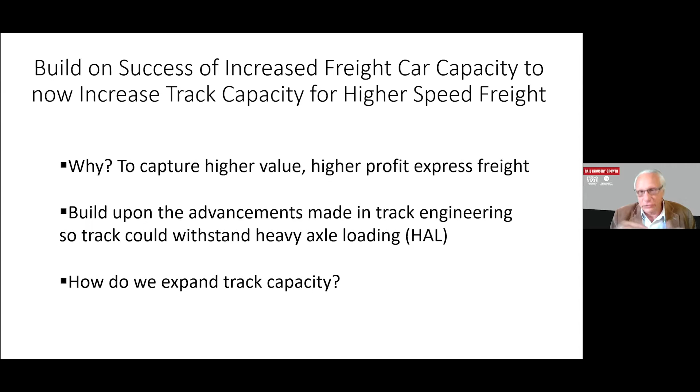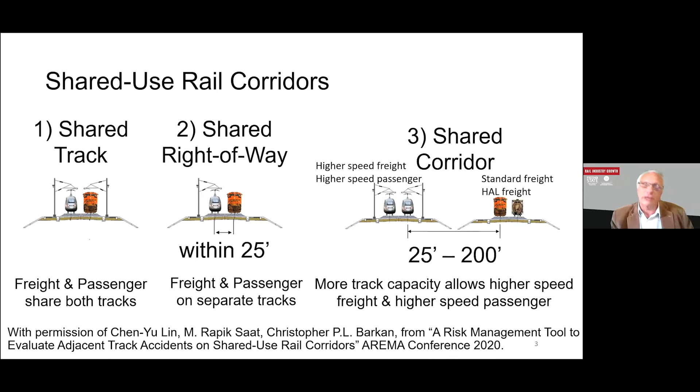And we could talk also about whether a barrier belongs there. There's a risk management tool that's referred to there. That is a paper I encourage you to read because that does address that issue, but we're not going to go into that detail for now.

All right, so I want to take you through some of the things we did at Amtrak where we did add track and it helped enormously. And we'll start with some simple civil engineering examples, and then we'll build up in terms of more complexity of how we can maybe provide this service, the one on the right.

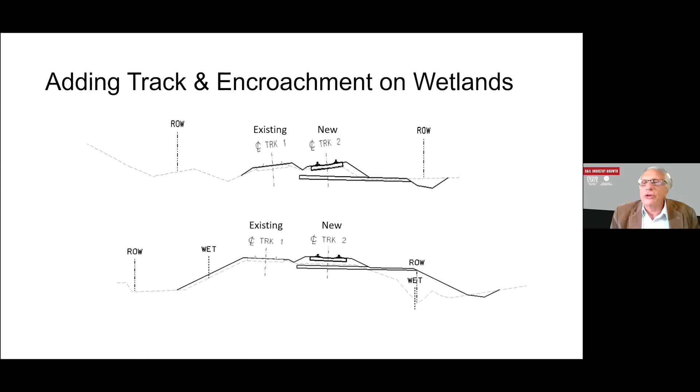So what we have to do in such cases is look at some retaining structures, such as you see there. If you didn't have that, then the slope would be in the red dash line, and that would encroach outside of the wetland. So permitting would be a problem. You might not be able to do it. Therefore, we do have the straightforward methods of going in and planning for a retaining structure to allow you to draw the slope into the gray line, which does not exceed the property, the right of way, or the wetlands. Again, this is fairly standard, so nothing too fancy about that. We certainly understand how to do that, but it is part of the planning process and the costing that would go into, can we do this?

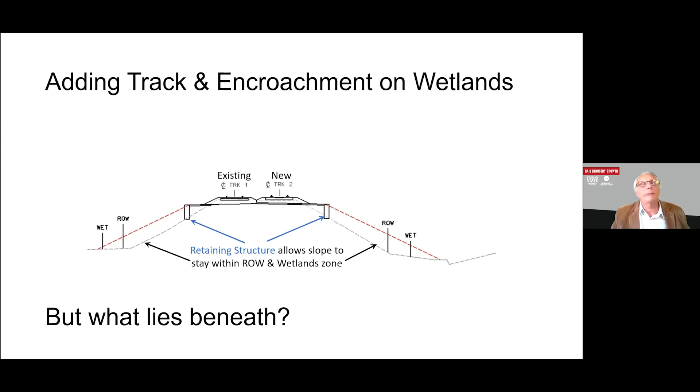Now that's fine for what the track looks like externally, but we want to know what lies beneath the track structure, within the track substructure, because that is such a key part of this. And again, what came out of all this investment over the recent decades, looking at how do we address issues of heavy axle load, how do we make the track ready for that? Well, one area of development has been the ground penetrating radar measurement system. Back when the industry was only just thinking about heavier axle loads going up from 110, this technology was sort of in its infancy. But over the decades, in large part because of the demands placed upon it to know what's going on with the track substructure, this was further developed.

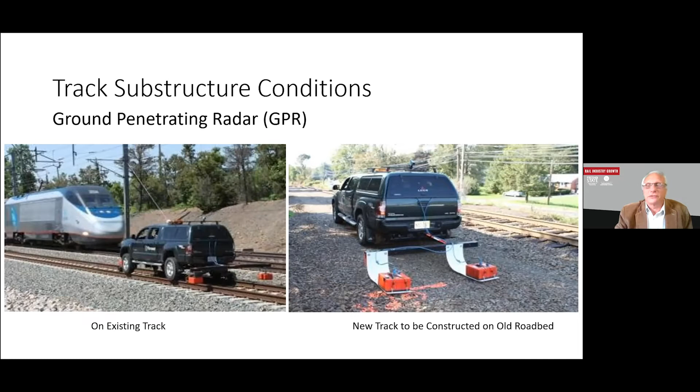So what you're seeing is some transponders that are suspended off the back of that high rail vehicle. They are bouncing a signal into the track substructure and listening to the echo coming back, processing the signal, and then from that you can determine quite a bit, as we'll see in a bit for a couple of examples. The typical case is what you see on the left, where it's on a high rail vehicle, looking into an existing track structure. But you may well want to look at the case on the right, where it's proposed that you have a new track placed over an existing road bed, and where you're going to double track a main line, let's say. There's no rails there, obviously, so you'd have to slowly drag those GPR transponders across, but it's the same idea, and the output that you get is just as valuable. An example of a couple examples of what we find.

And if you just place a new track on top of it, you could reawaken instabilities that are latent, that are just in there and will be reawakened once you start loading it. You want to know that before you put track over it. Or it could be a case where track 2 is going to be upgraded. Perhaps it's a class 4, you want to make it a class 6, and it's the same issue. You don't want to be caught unawares of some instability that when you do increase the loading and you hope to maintain a nice track geometry, you want to be sure and remedy anything before it gets that far along.

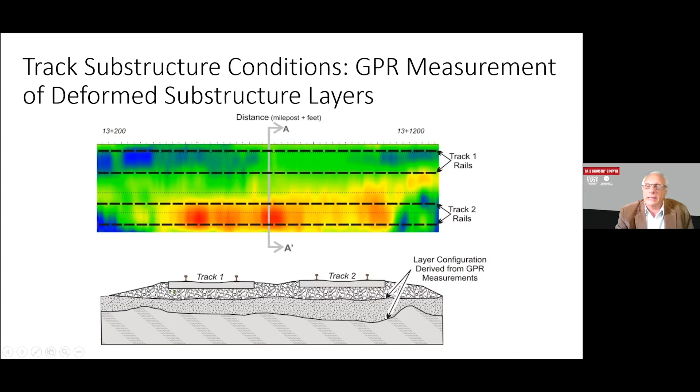So that's a GPR measurement that can look down into the substructure by some depth. You could also look at a more shallow depth. So that's looking down here in this case, but you could also tune it to look at a more shallow depth, let's say in the ballast, to look for how much ballast fouling there is in an existing track. An example is shown here. Looking down from above in a plan view, a 4-track territory, you can see by the heat plot again, hotter colors mean more ballast fouling. Drainage is poor in those areas, something that you might need to address.

Again, if track 3 is the existing track you're looking at to upgrade from perhaps FRA class 4 to class 6, you might well want to know those areas so you can address them, remove the ballast, renew it, or whatever you have to do to improve the internal drainage before the class 6 service begins. So all of these are techniques that are now available that can lend themselves also to increasing speed as well as increasing the loading as has been done.

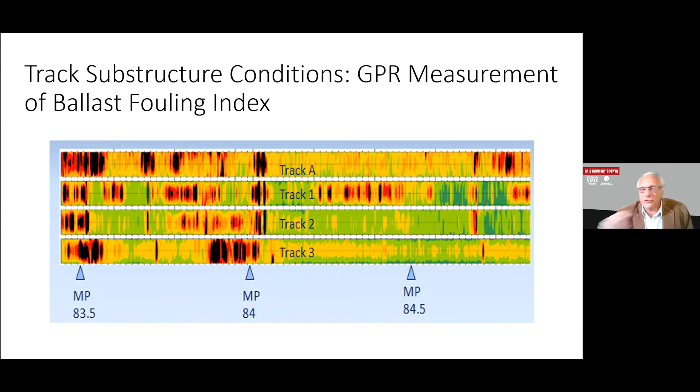Another thing that is vitally important is to not have to maintain your track so often such that your maintenance equipment gets in the way of your revenue trains, of course. Those spots that show as heavily fouled are probably joints or something that causes a lot of dynamic load. And then because they deform, you have to come in and tamp them. Well, the tamping itself also degrades the ballast, right? So it's a further whammy against having good conditions. So what you would like to be able to do is have better maintenance methods that don't degrade the ballast as much and also give you longer lasting geometry corrections.

There are a couple that have been developed over the years, again, with the intent to address the problem of increasing axle loads to make it a more durable track. This is a type of maintenance known as stone blowing. It was actually developed in the UK, and we brought it over to the United States. The process is one where instead of tamping the track, you would use a different system. It could be handheld tools, or there is a mechanized version of stone blower too. But the process is one where you would raise the track as shown from 1 to 2. At 3, it shows an ejector tube being placed at a certain depth so that you can blow stone underneath the tie. That's what you see in number 4 there. So air is introduced. That's a venturi tube.

There's an orifice that restricts the flow, and then on the other side of the orifice, where it suddenly opens up, that makes the ballast pick up speed and shoot under the tie as shown. And then case 5 shows where you place the measured amount of stone, and then you lower the rail and tie onto the stone-blown material.

This whole process is minimally disturbing to the ballast. It does not degrade the ballast hardly at all, as tamping does, and it also does not loosen the ballast. Therefore, you're building off a stable base. That's where the increased durability comes from. And how much more durable than conventional tamping? It could be typically 3 or 4, but we have seen 5 times and more increase in durability over conventional tamping.

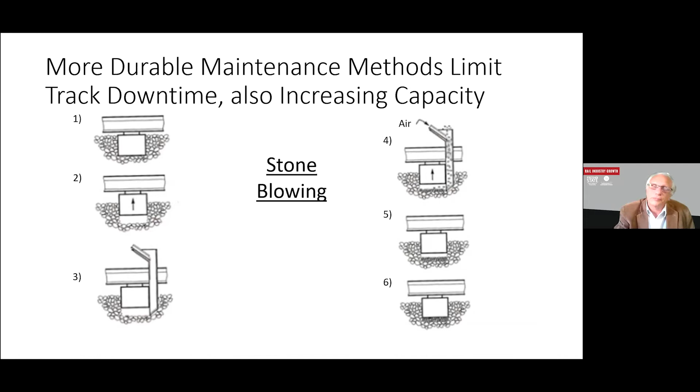Another technique that also has been developed to address this very issue, to get an increased durability of maintenance, uses a tamper in this case, but in a different and innovative way. It's called design overlift tamping. And the whole approach here is to take your existing rough track profile, which is the bottom line here, right? And raise it to a certain level, but then overlift it beyond which it would be level where the dip is removed. You actually raise it above the amount of the dip, so that once it's up there, you know this is going to happen.

When you tamp track, you get an initial fairly large settlement. But what you don't want to do is bring the track up to level and then have it settle back substantially, maybe all the way back to where it was. You want to account for that initial settlement that happens with the first few trains by overlifting it by a design amount, such that when traffic begins to pass over, it settles back down rather fast initially, and then slower and slower and slower, so that it spends a lot of time right at that design elevation shown right there.

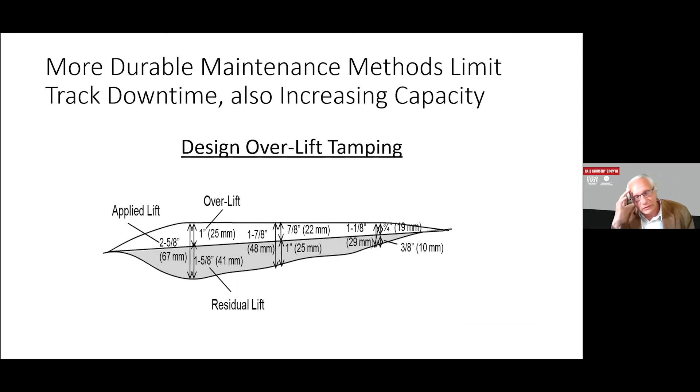So you're accounting for the mechanism of ballast settlement, and you are raising, depending upon where you are in the dip, a measured amount so that you end up with this optimal smooth profile. And this has been shown to work, as has stone blowing, for heavy axle loads, for high-speed trains. It works really everywhere. Here's an example of how well this works in the case of design overlift.

Here you see your original rough profile rail, and then immediately after you've designed overlift. So it's not optimum. It's a little bit rough in the other sense. It's a little bit raised up. Not too bad, but it isn't perfect. But it does approach the design after some traffic. You see how after 16 weeks it settles quite a bit, and then after a year it's pretty much settled into what you might call a smooth design, and then degradation thereafter is slower and slower. So it never really returns to where it was. That's a problem that often happens unless you apply some improved techniques such as this. So basically you're kind of removing ballast memory.

This can be done. And once again, the improvement of design overlift is about the same over conventional tamping as stone blowing does. It's about a factor of 3 or 4, lasting longer than conventional tamping. So you're out there maintaining it less. You're also degrading the ballast less. Medical professionals say, first do no harm, but we as engineers, at least we can say we want to reduce the harm we do. That's the goal of this.

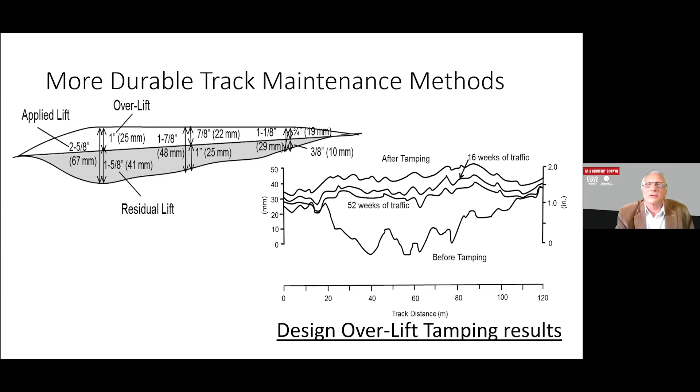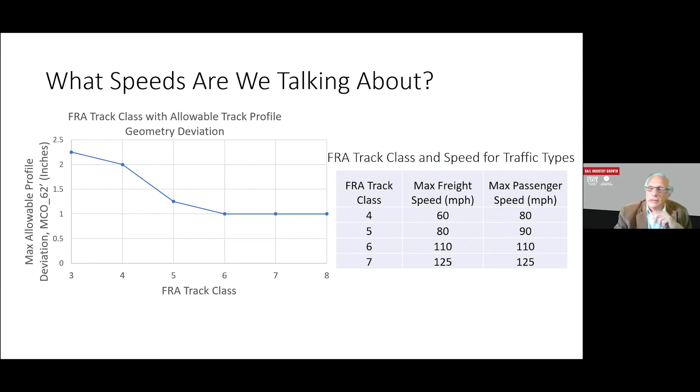All right, well, we haven't talked about what speeds we're referring to when we say, not yet anyway, about higher speed freight or higher speed passenger. I want to talk about that in the context of the FRA chart on the left, where it's the limiting amount of vertical deviations or dips in the track over some chord length, 62 feet in this case, based on FRA track class. And then the table on the right, which relates the track class to the allowable maximum speed for both freight and passenger. So if I go to the next slide, we'll see what speed we're talking about in this case.

Typical for freight, you might say, is a class 4. And you can see the speeds that are related to that. So for higher speed passenger, how fast are we talking about? Well, let's first make it easy. Higher speed passenger for class 6 is 110, and totally achievable, of course.

But what speed are we talking about for higher speed freight? Now again, when we started this, we said, well, something greater than 80 miles an hour, which the conventional 3-piece truck has a hard time doing. So we want an advanced truck that can, so we compete with over-the-road trucks, something greater than 80 miles an hour, certainly. Maybe not as fast as 110, although that's something that could be attempted.

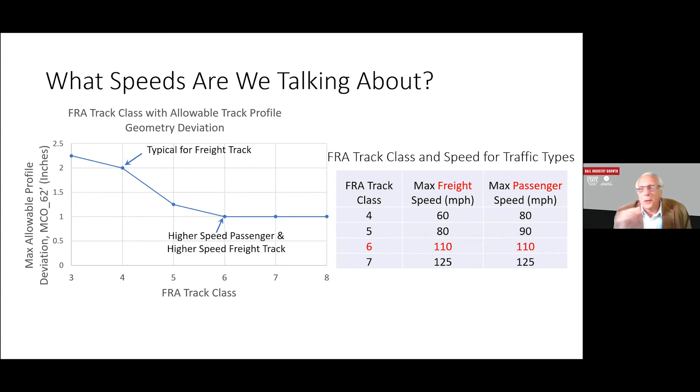But here's the issue. As I said, the conventional 3-piece truck often has a problem trying to pass the stability requirements as you approach 80 miles an hour and get beyond it. Now, typically, the 3-piece truck has no problem getting up to around 70 miles an hour, and you may get a little bit more. But there's that barrier at around 80 miles an hour where, although the 3-piece truck is robust and very forgiving, a real workhorse for the industry, we're simply asking too much of it as we get to higher speed freight above 80 miles an hour.

So if we want to compete with over-the-road trucks, we have to have an average speed of around, let's say, 60 miles an hour. And I think Dennis Newman mentioned 60 miles an hour being the target speed for the higher speed passenger, as well as for an average speed. Well, to get that as an average speed, we need to have somewhat of a higher maximum speed. So now we're getting a little bit better defined in terms of what we're talking about. To get around 60 miles an hour average, we might have to have a maximum in the range of 90 to 110 miles an hour, which requires class 6 track, which again goes back to the same for the higher speed passenger service as well.

So we're talking about roughly the same range of speed for high speed passenger and high speed freight. And beyond that, the wheel loads are about the same as well. So that all helps to keep both in the same sweet spot or footprint, if you will, so that they don't get in each other's way. One does not cause an excess amount of degradation to the track than the other. So they kind of complement each other as long as they're kept separate from the heavy axle loads.

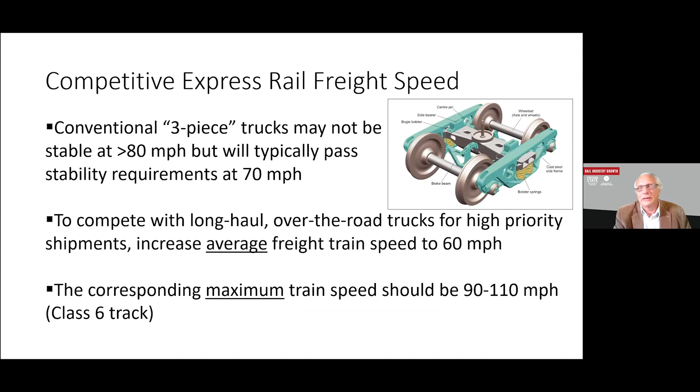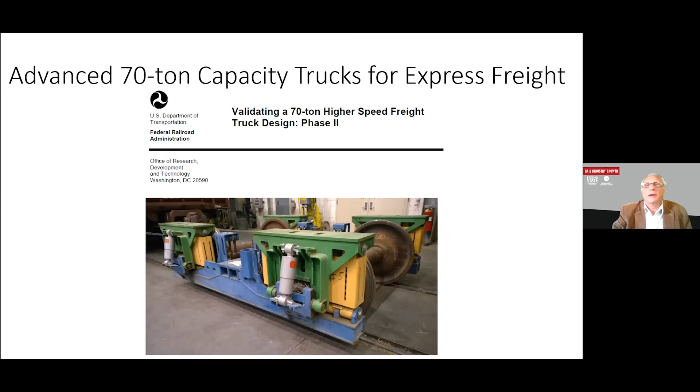The stability problems of the three-piece truck start popping up maybe around the high 70 miles an hour into the low 80s, but you can have, with improved design, a high-speed freight truck that can go well above that. And I should add, this gets back to a fairly lightly loaded, returning to lighter loaded, going back to 70-ton, which is appropriate for the level of service that you might think of initially: lighter packages, parcels, maybe, but that needs to be expedited. Perishable produce from the San Joaquin Valley, let's say, coming out of California and going to points east, that sort of higher speed freight. That's time sensitive.

And when we talk about stability, there are a number of things that contribute to whether a rail vehicle is stable or not. But the wheel-rail contact, and especially something called the equivalent conicity, is vital to watch. And here's where, again, much research has gone into this wheel-rail interface. We can take the benefit of that research and results and apply it to higher speed freight, just as we already do to higher speed passenger.

Now, when I was at Amtrak, we were well along in developing this, because obviously it's safety critical for high speed passenger, as a way to monitor your wheel and rail profile, so that as they both degrade, you track the equivalent conicity, that is to say the conicity at the point of contact, right? Not just the tread taper, but rather the conicity that results from the mating surface of the wheel and the rail, where those red dots are that you see there. This is an example of a vehicle in a curve, so you have flanging on the right-hand side, and the contact point is shifted into the flange throat, and that's a natural condition for the equivalent conicity to be somewhat high. Now that's in a curve.

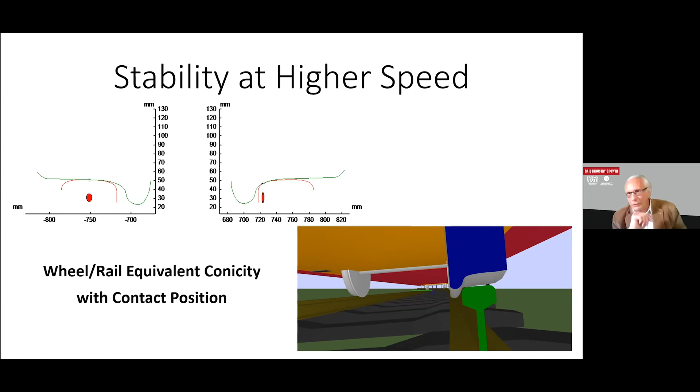We're not so concerned about stability in a curve, but when that contact happens on a straight, on a tangent, that's when you do have to be concerned about the equivalent conicity getting too high and instability happening. But as I say, this is something we've thrown a lot of research at. We understand that. We have the analytical models available to see when that's coming. We can predict it well in advance. We monitor the degrading profile of the wheels and the rails, and we can say, okay, the equivalent conicity is starting to increase. At some point, it's going to get to a threshold where we say, okay, let's get that car to the shop and reprofile the wheels, or maybe go out and grind the rail, regrind the rail, to return it to a new condition and lower the equivalent conicity. All things that came out of the research effort over many recent decades that can be applied now.

Now, why do all this? And I say this advisedly because I understand we've talked about debt a little bit, and who pays for things and all that. Those are very good questions, and ripe for debate. But why necessarily look at any of this? Well, why do we need to change and to adapt to changing markets?

I would just mention two things that come out of environmental concerns. The Union of Concerned Scientists provides the quote shown there, where net zero carbon emissions are the target by 2050 or sooner, and even sooner than that. The Intergovernmental Panel on Climate Change has set a target of 45% reduction in global emissions in just 10 years. Now, draw your own conclusions about how that changes what the freight railroads haul. But I think we as engineers have to anticipate this, and as business people and anybody that wants to see a strong future for the railroads, however we feel about this, certain changes are coming. They've already happened, and more are going to come.

So here's where we tell the rail industry about the advantages that it already has: an inherently higher fuel efficiency. It starts out fairly green. It has low rolling friction at the wheel-rail interface, the contact, and we can build on those things to make for a mode shift of passengers and goods from roads to the rail.

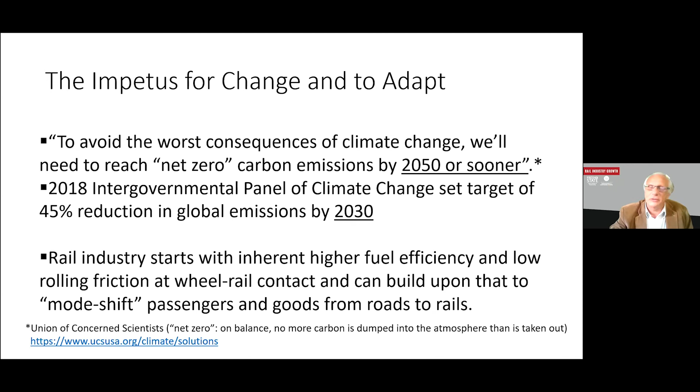So again, this could be seen as the why we might need to do something. I'm going to end with a quote that you've probably heard of before. I like it. Make no small plans. That's especially appropriate maybe because Daniel Burnham is the architect of the Amtrak station in Washington, D.C.

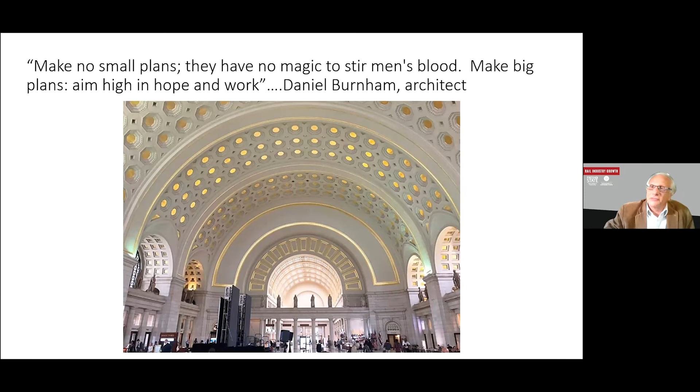And my final slide, which I can't see because something is in the way. We all have people, a lot of us in the industry have grandfathers, great-grandfathers in the rail industry. And so that's very common.

But I bring it up only to say that they have given us a great inheritance of a strong, vital industry that we want to be sure and hand off to future generations, and so that we have growth that's stable and continued. As markets change, and maybe we can anticipate some of these changes and put the railroads in a good position to take advantage of them, not just survive, but in fact thrive. So with that, I conclude my presentation, and I look forward to any questions, comments, criticisms. It's all welcome.

Let me stop sharing.

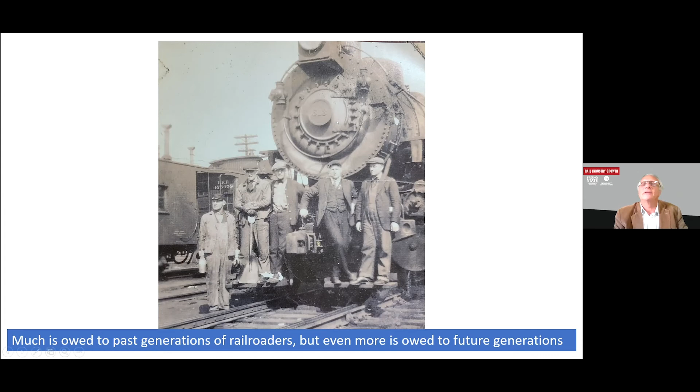Well, more of a comment, though. I have to say, great presentation, Steve. It did start my thinking on several paths for research from things that you were saying there and had mentioned. So I'll have to continue with those and get you involved on that. But really, there's some great things to think about there. And with the technology advancing, the products can be changing. I just have to comment and say, very good.

Jim, do you have any questions? Yeah, but I wanted to make sure Steve got a chance to go first. Steve Ditmeyer, if he wanted to. I don't want to monopolize the questions.

But so I have an observation. We did a cost-benefit analysis, Pradeep Patel and I, for Dr. Zarembski and Harsco Rail on their stone blower. And yes, we were able to demonstrate there was a business case that said it was much more cost efficient on a maintenance-of-way budget if you use stone blowers for high speed or heavy axle load railroads than using tamping machines. Because one thing the tamper does is it basically starts to destroy the structure of the stone, from physical force, which then has to be replaced earlier.

But we found that one interesting thing is Harsco Rail, this is off the record, I don't want to beat up on a company, but Harsco Rail is the only manufacturer that I know of that's got a license for the stone blower at a big scale. Never wanted to risk the R&D cost of building a machine and bringing it over here and using it as a demo. And so we never sold any stone blowers in North America, only in Europe. Yes, Jim, I kept going after Harsco to say, please let us have a trial machine. They just never. Risk averse. It was a financial decision. In my estimation it was a financial one. Others may argue otherwise.